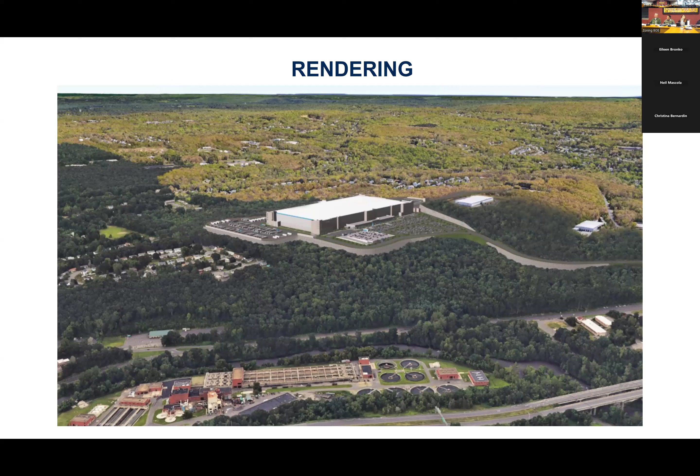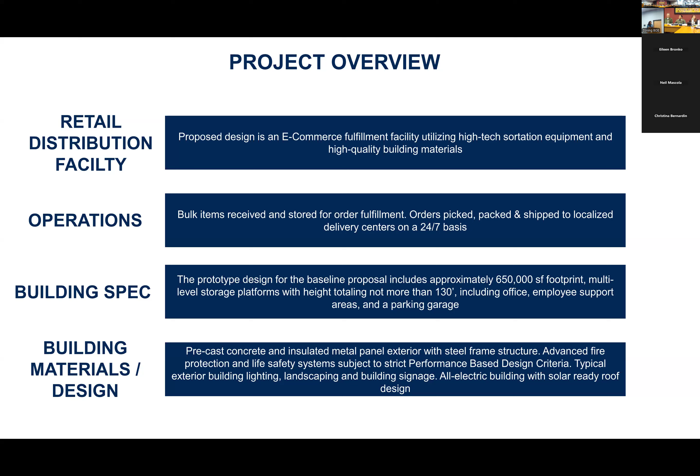All goods that come from this distribution facility will go to another distribution facility that then delivers goods directly to consumers. Operations run on a 24/7 basis, 365 days a year. The building we're proposing is going to be all-electric, so we've already started the process with Eversource on meeting the electrical demand for the site and understanding what improvements are needed.

In terms of project benefits, buildings of this scale are typically assessed at over $150 million. For this site, we're estimating the value to be over $200 million, which would go to both Waterbury and Naugatuck and increase the tax basis. There are a lot of permanent jobs that come with this building -- we're estimating between 500 and 1,000 permanent jobs.

That's because most of the picking happens on the higher levels with employees working to get that stuff done. Also during the construction schedule, between 24 to 30 months as our preliminary estimate, it will bring about 300 jobs throughout that duration. Additional project benefits include some of our offsite improvements, which we'll talk you guys through today as well.

As a site overview, to orient you all to the location of the site, this is a zoomed out view of both Waterbury and Naugatuck. The area highlighted in purple in the north is the limits of Waterbury, and to the south is Naugatuck. Our project is directly in the center and spans both municipalities, highlighted in yellow in the middle.

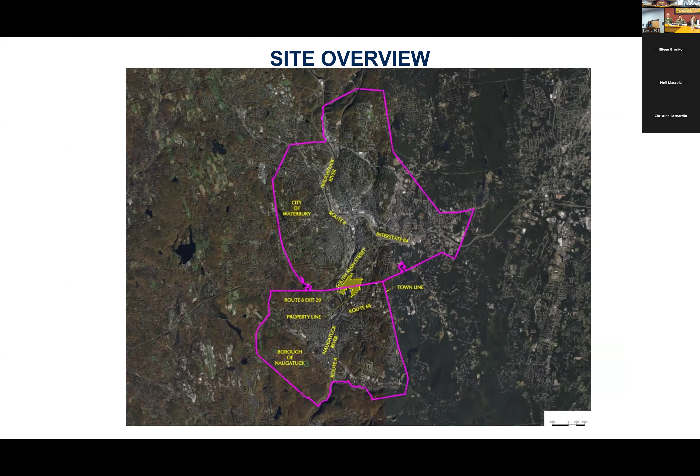This is a zoomed in view of its location. There are multiple parcels that comprise this project and development. The parcels in yellow -- the main parcel is to the north, and then to the east there are 2 parcels within Naugatuck, also noted in yellow text, which are the parcels that will be purchased and where most of the building will sit.

The parcel in orange is just to the west, between the division of Waterbury and Naugatuck, just south of that. That parcel is owned by Waterbury but located in Naugatuck, and in the purchase and sale agreement it will provide easement and access to the main site. The last parcel, in blue text, just south of that one, is currently owned by Amazon and will also help facilitate access to the main lot.

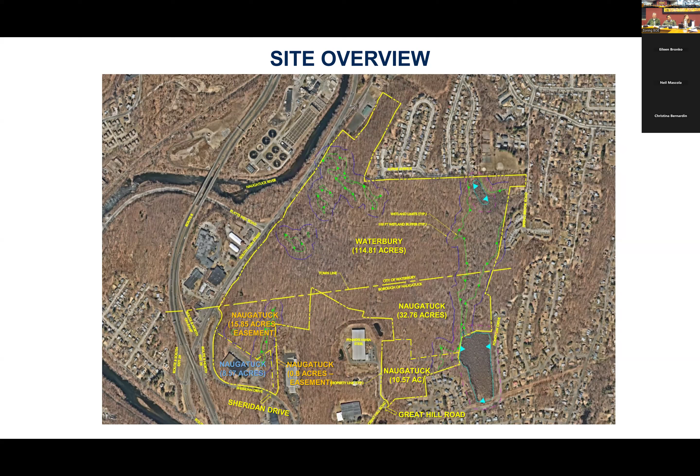This provides some history on this project. Both Waterbury and Naugatuck wanted to use the site that they own to spur and encourage economic development. The topography of the site is very challenging -- it ranges about 300 feet in elevation, so access from South Main Street is basically rendered infeasible for the site.

They came together and purchased that 10-acre lot that sits at the foot of Great Hill Road, which helped provide access to the site. That one location is what we're using as the main truck entrance and exit for the site. The other parcels, where we're having easements and are purchased by Amazon, will also provide access for employees and trucks on a somewhat infrequent basis.

I do want to note consistency with the plan of conservation and development. Again, the goal is to encourage economic growth and foster new job opportunities and job creation, which we're doing with full-time employment as well as construction jobs for the site. Also, a specific goal and strategy is to recruit new businesses, which we will be doing with Amazon as a tenant here. The land use section in the plan of conservation and development specifically references the Waterbury and Naugatuck Industrial Park, where the site is located, and references the site as a potential Amazon distribution facility.

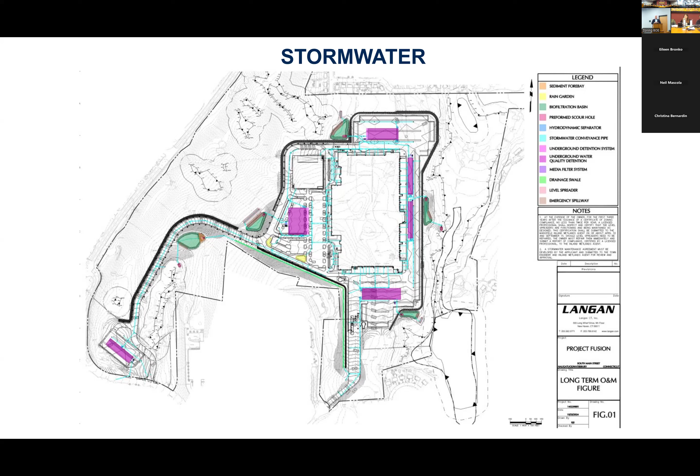This is probably the first project of this scale that will require compliance with that, and it has dictated a number of improvements above and beyond what you've seen in other development projects. We have hydrodynamic separators, or vortex units that spin the water, underground chambers that capture and attenuate the flow, and a filter system that filters the first inch of runoff prior to discharge off-site, allowing us to do phosphorus and nitrogen treatment required in the new stormwater manual. So it's a significant treatment train for stormwater.

Here are some photos of what those components look like. The top left photo shows the underground chambers used to capture runoff from the roof and pavement, allowing us to meter it off to mimic existing hydraulic conditions. The photo to the right shows what the filters look like - these are whole house filters you may have, but at an industrial scale.

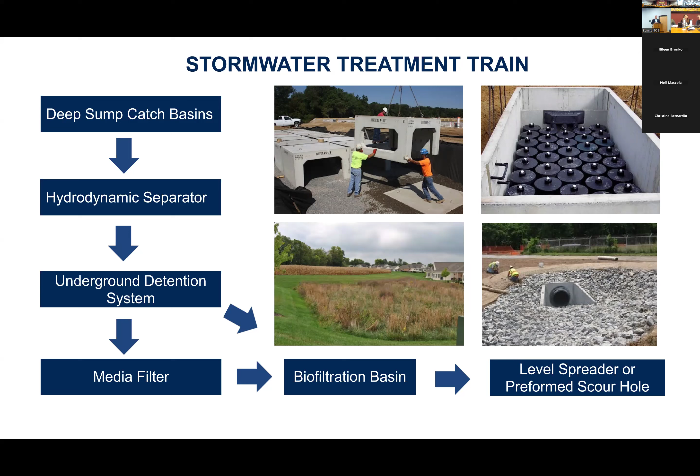They live within a vault and provide filtration of the water prior to discharge. The lower left-hand photo is representative of what the basin would look like after the water is retained in the structures and filtered. We then discharge to a pond, which provides some final finishing and cleaning, with a meadow type finish like shown here. The last step is a controlled discharge through a pipe and riprap to take the velocity out of the water and allow it to head back to adjacent wetland bodies and offsite locations.

Soil erosion and sediment control is important for a project of this scale, and it's something we spent considerable time on during the inland wetland process. As part of the site plan application, we have a 3-phased approach. We show how soil erosion and sediment control starts essentially on day 1 as site clearing begins. We have a phase showing what it will look like as retaining walls are built and subgrade is being prepped, and a 3rd phase showing what would be used as we head towards final paving.

Catch basins may be installed, underground systems exist, basins have been installed and need to be protected - this has been reviewed by your 3rd-party peer reviewer. It's subject to Connecticut DEEP permit application because of the scale of the project, so we will file a general permit with DEEP for registration. Also because of the scale, we have to retain a 3rd party, independent of Langan and of Tighe and Bond, with no involvement in the design, to do another round of peer review for our soil erosion and sediment control measures. They must attest to DEEP that they've reviewed the plans and that it's in conformance with the state's guidelines.

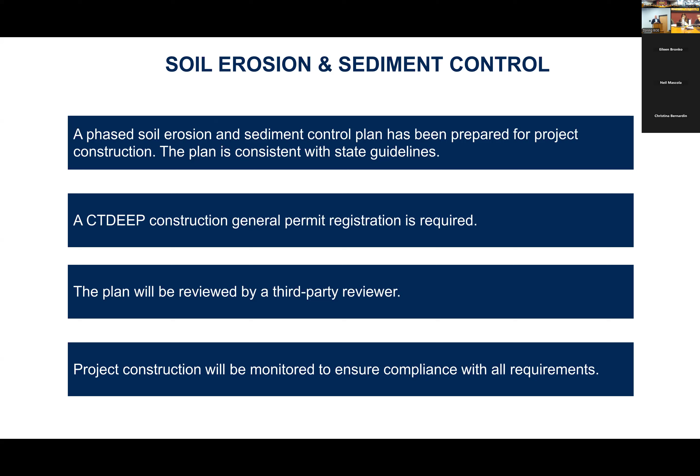In addition, during construction, the general permit requires weekly inspection as well as inspection after significant rainfalls. As part of the wetland approval process in Waterbury, they have also identified an independent party to represent the city to do periodic inspections, making sure the construction team stays within the bounds of the permit. So there are lots of eyes on ongoing soil erosion and sediment control, in addition to oversight from the state.

In addition to site lighting, also prepared by our landscape architecture team, there is a planting plan identifying installation of new trees, shrubs, and ground cover to restore disturbed areas, as well as how we would plant the stormwater management basins. That's supplemented by wetland mitigation work proposed and included in our wetland applications to the borough and city, where we enhance areas we don't disturb as part of site work but that include invasive species within the buffer area surrounding the sites. So as part of our permits in both the borough and city, we have additional landscaping work that removes invasives, plants native species to help box those out, and includes a monitoring program to ensure sustainability.

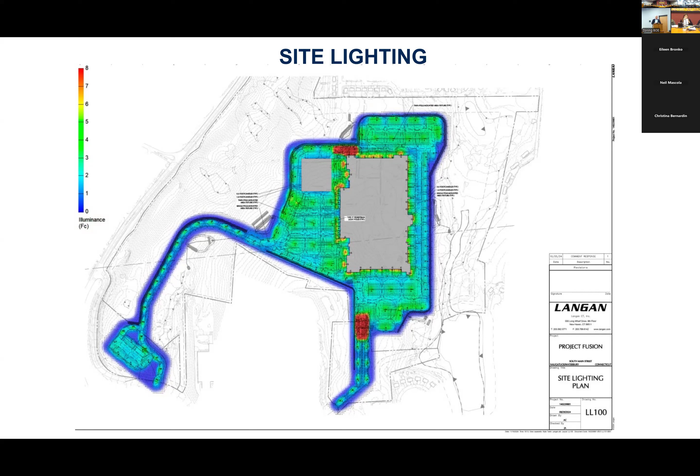Oh, you're right. I'm sorry. I went too far, I was on a roll.

There we go. Great. Thank you again, Tom Cody.

I wanted to point out for a moment, we submitted a letter this morning seeking an interpretation from the commission regarding one point in the zoning regulations, which came out of the discussion we had with Tighe & Bond and the town staff as we went through the site plan.

The question was asked about a retaining wall, and the retaining wall in question is at the southern end. Down at the very southern end, as the entrance drive, this private drive comes down to intersect with Sheridan, running along the length of that drive is the retaining wall. The retaining wall is in part supporting the drive as it reaches Sheridan.

And that retaining wall crosses this property line here, and it also crosses very slightly here, this other property line. This is the parcel owned by Amazon. This is the parcel owned by the city of Waterbury. And the question was whether this retaining wall, which was really part of the private drive,

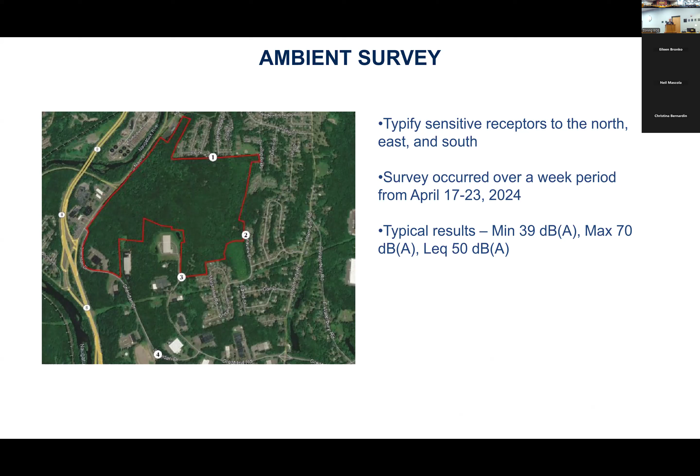To me, that provides great alignment with the directive from the state and from the Waterbury Code of our target goal of 51. So if we design the site to have maximum levels of 51, that's going to blend in very well with the existing average levels of 50.

I'm going to show our models and results, but first give you the background of what we'll look at in the next couple of slides. Our first step is looking at the stationary noise sources - that's going to be the mechanical equipment. We have over 60 different units that are large enough in size to be of interest for a sound study.

There's also dozens of smaller ones, but when they get so small, they end up not contributing to the greater picture - there's no cumulative effect. So we look at the big guys, 60 of them, distributed across the building. We're also considering parapets around the building - those not only screen visually, but also acoustically. So those are going to be big components of our HVAC analysis.

Getting onto truck activity, we know trucks are going to be coming and going on site - those are significant contributors of noise. There's no denying a truck is a high level noise source. We see activity within the truck court ranging anywhere from 74 to 79, depending on whether the truck is idling or driving. Some of our bigger culprits of high level sounds would be backup alarms, coupling and decoupling - when trailers connect and disconnect - and also air brake release.

Given the variety there, you can see from the slide where we point out that idling trucks are down at 62 dBA at 50 feet. That's significantly lower, on the order of 10 or 15 dB lower in level than some of these high level events. So what happens is they're so low in magnitude that they don't influence the cumulative effect off-site. For a noise study, we traditionally don't look at idling trucks as a contributor of noise. We understand there are also regulations limiting their duration, but the focus is to see our maximum emissions and have those comply with our project goals.

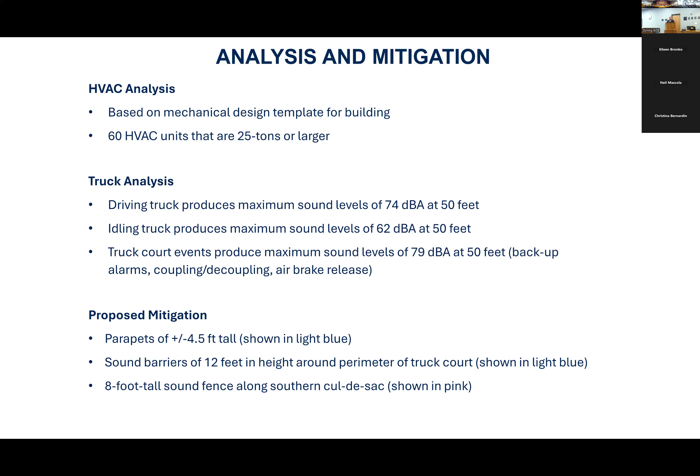Not much else to say about this other than this is the presence that's there 24/7. So in the absence of truck activity, this is where we fall down to.

Question? Yeah, could you give some examples? You're saying 40, 50, 60. Could you give examples of what that sound is?

Sure. I can speak in terms of magnitude. The daytime limit is 61 - these numbers aren't picked out of thin air, although they can vary a little bit per jurisdiction. Something in the mid 60 range would be two people speaking at 3 feet, about 65. So having a daytime goal of having external noise not exceed that would mean we wouldn't have to elevate our voices to have a discussion. That's what the daytime limit is there to prevent.

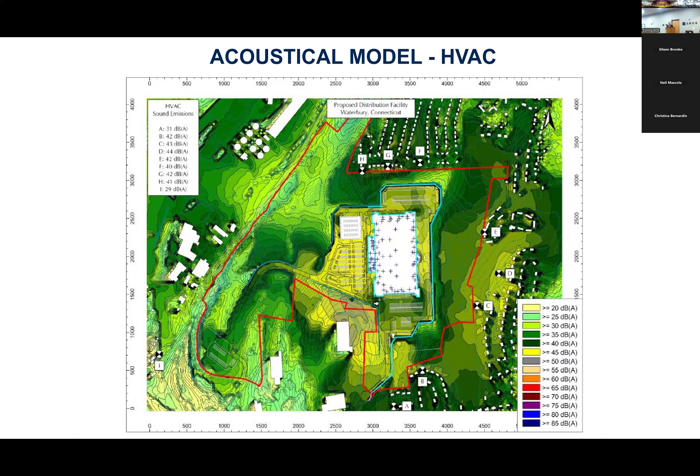Of more interest would be our truck activity. Now we know the trucks are coming and going through the day, but we have to recognize that they are dynamic. Trucks go and come, and much like we'll hear about traffic next, we follow a lot of the same premise and use much of the same data. We know that over the course of an hour we might expect X number of vehicles, but they don't all show up at 9:01 or leave at 9:59. They're distributed across that time. So one of the challenges we have from a noise point of view is how do we represent that time factor? I already have a three-dimensional model, but I almost need a fourth dimension of time to be able to press play and show how these will interact and move across the site.

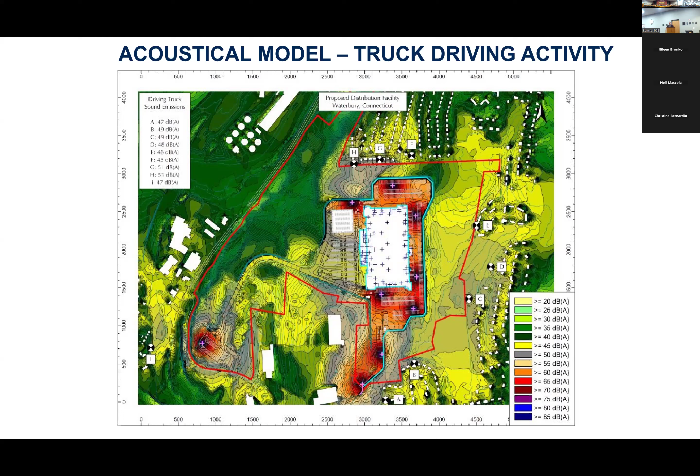So just a summary - we were able to look at our steady contribution of HVAC. The presence there is going to be anywhere in the 40 range, low 40s. That's well below the average, and in fact it's more aligned with some of the lows. We showed that during the 7-day ambient survey the lowest level measured was 39, and that only occurred for an hour period on a day or two, so that's not the bulk of what the area is made up of. But having HVAC be down around that area really shows how that's going to blend in with the environment and not be disruptive.

Now, on the other hand, the truck operations - we show that the activity on site, as dynamic as it would be, we could have a considerable amount of activity on site and still cumulatively meet our project goals. Those will be in motion, so trucks come, trucks go, there'll be lulls, then activity, back and forth on that scale. We showed that those comply with project goals as well.

In summary, the project is able to show that we meet our project goal, which is aligned with the existing ambient, which is prudent because that means we're not going to have a negative impact. That also aligns with what we've established as not only the local, Waterbury, and state code limits, but what we've also adopted as our project goal for trucks, even though they're not regulated in the same way as stationary sources. All of the above help support that this project is going to be a good additive to the area and not result in any negative impact, and that the site is well designed to allow that to occur.

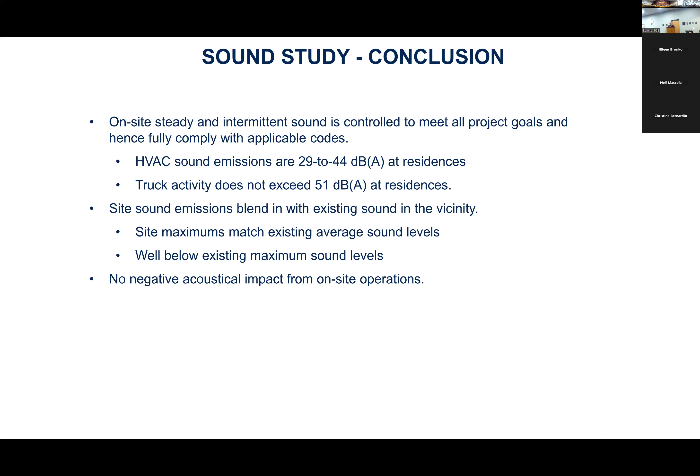Now to traffic. Question? Yep. I just have a few questions. Number one,

Decibel is a unit of measure. Please correct me if I'm wrong, but for each decibel point that goes up, that's a doubling of the previous number. In other words, it's not a simple case like on your radio where one click is 1 decibel. In reality, going from 50 to 51 would actually mean 51 is double of 50.

It's challenging to think of it that way, because a lot of people also talk about loudness being twice as loud, and loudness has its own unit than decibels, but just know the unit is decibels. I have an A at the end, referencing the A weighting. Frequencies across the spectrum are what they are, but our ears hear them a certain way, so that A-weighted metric corrects that to be balanced, using the appropriate environmental metric.

But it's a logarithmic scale, not linear. So if we have 2 compressors each producing 50, and I'm standing 10 feet away from them, the resulting combination is 53, not 100. When you see the addition of two, the most they change is 3, to give you a feel for how those relationships are to the human ear.

Changes of 1 or 2 are going to be very difficult to discern, if at all. Changes of 3 will be just discernible for somebody with good hearing. Changes of 6 are going to be noticeable, and changes of 10 is where you see either a doubling or halving of loudness. So there are complications there because we're dealing with energy and how it gets added.

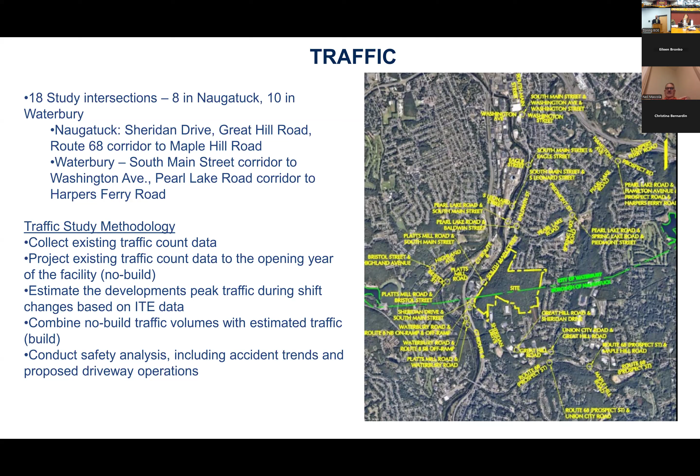Lastly, we add the baseline traffic from 2027 to the traffic we're estimating to be coming to and from the site, and then you get your build conditions. What we did there is analyze the existing, the no-build, and the build conditions, with the traffic volumes associated with all three, to compare the exact delta in terms of traffic queues and traffic delay between pre- and post-development. That way you get a good idea of exactly what the impact specific to the development would be. Based on that, we conducted our traffic study, and we'll get to the results in a minute.

So we do feel that the project is less impactful, specifically due to its proximity to Route 8. We feel that Route 8 gives people a way to get to the site over on the highway and get off the site, or get off the highway, with pretty much less than a mile from the exit ramps to the front door if you're an employee, just over a mile if you're a truck. It really assists in limiting the impact of this facility to the surrounding roadways.

So what I mean by that is there are going to be employees living in Naugatuck, living in Waterbury, who will be driving to this facility if they're employed here. There are many ways to get here, but there are some people who live on the north side of Waterbury or the south side of Naugatuck for whom it may be quicker to get to the highway. So while we did study a wide range of intersections, many people will opt to take the highway to get here. The Naugatuck River is kind of a natural barrier that prevents people on the west side from getting there, so sometimes it might make more sense for them to get on the highway.

So we feel that the proximity to the highway actually is a net benefit to this facility, limiting the amount of traffic directly resulting from the facility on the surrounding roadway network. And with that, the results of our study show that the existing roadway is capable of handling the added traffic from our site, with a few notable improvements, which I'll get into in a minute.

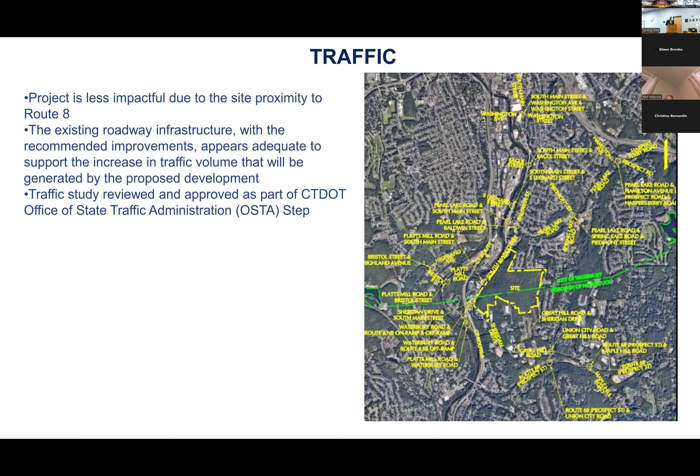Before I get into the recommended improvements, I wanted to touch on employees traveling to the site, but also give more information on truck access. Trucks have a little over a mile to get to the site.

Most, if not all, of the trucks we're forecasting will be coming directly from Route 8. It's the quickest and easiest way to get to the truck entrance off Great Hill Road, directly from the exit 29 ramps. Most of the trucks coming to the site are bringing raw goods or prepackaged goods to be sold and packaged, and then the trucks leaving are carrying fulfillment boxes going to another facility for delivery. So trucks will be coming to and from the site for two different purposes.

Many of the trucks are going to be coming directly from Route 8, because that's the easiest and best way to get there for goods coming from longer distances. You'd get off exit 29, either coming north or south on Route 8, turn onto South Main Street, turn right onto Sheridan, go up the hill, take one left, and once you're at the top of the hill you're at the main truck driveway. It's a little over a mile.

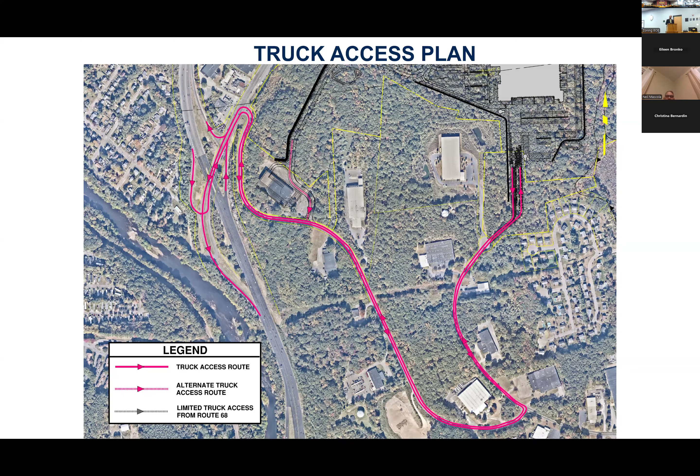Specifically at the intersection of Great Hill Road and Sheridan, we are proposing to widen this intersection to handle the additional trucks coming to and from the site. Despite this intersection being in the industrial park, we've noticed that under existing conditions there's rutting, curbs being banged up, and landscaping being driven over by trucks today. So we're proposing to widen this intersection to allow for the greater volume of trucks, but also to accommodate existing trucks that seem unable to make the movement without driving over the curb.

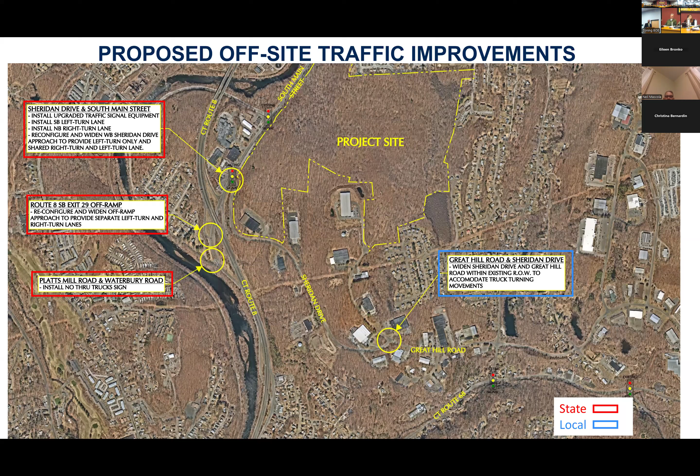I'll get into the details in a minute, but to highlight - we're going to focus on the South Main Street and highway off-ramps here. This slide shows the intersection at the southbound Route 8 off-ramp. What we found in our study was that many employees coming to work are taking the left, and we don't want traffic backing up onto the highway.

So what we're proposing is to add a separate left turn lane. Right now it's just one lane where you turn left or right. We'd be adding a separate left turn lane, allowing people going to the facility or cars trying to turn right today to make their movement safely. To support that, there's a grass median that we'd have to shift to the north. This intersection is under state jurisdiction since it's a state highway. They're looking at it, but we're going to meet all sight distance related requirements and make sure this intersection can accommodate both passenger car and truck traffic.

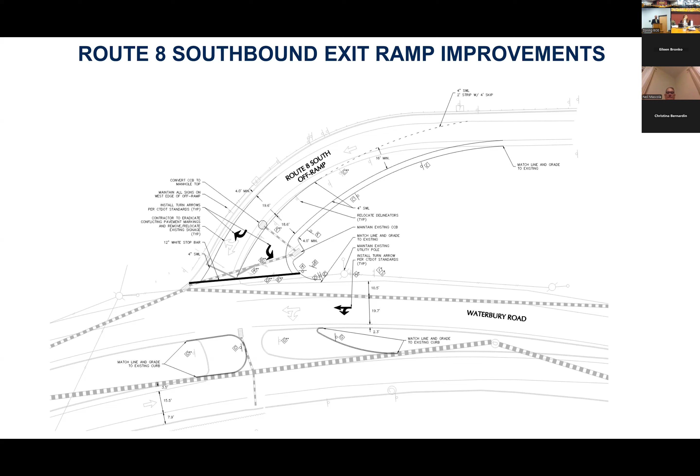Moving just slightly south here, we have heard concerns from neighbors in the Platts Mill neighborhood community about existing truck traffic just to the south.

I know that Platts Mill does kind of horseshoe around and come back to South Main Street in Waterbury. But it's the residents in Naugatuck that we've heard from have concerns about some of the existing truck traffic that's there today. I will state for the record that no Amazon trucks should be taking this road. There's simply no reason to. There's no way for them to get anywhere they need to go by taking this road up Platts Mill.

But hearing from residents, we've heard that there's existing truck traffic that is either a nuisance or noisy or something of the sort. So what we're proposing here is a no-through-truck sign to alleviate an existing concern. We're already going to be going to the State of Connecticut DOT for their review and approval on pretty much everything else, and signage and the regulations around that would be something we'd commit to doing with the DOT's approval. So we wouldn't be impacting it with our facility, but we'd be trying to eliminate an existing concern.

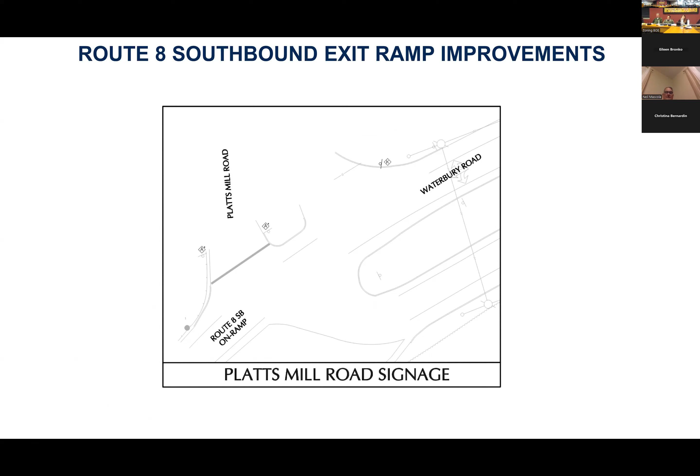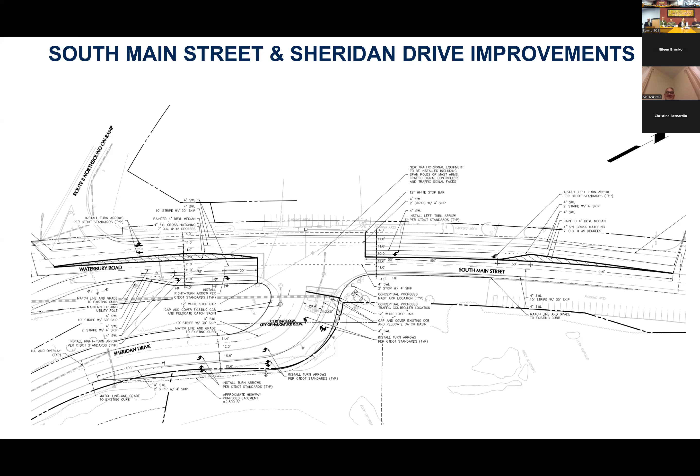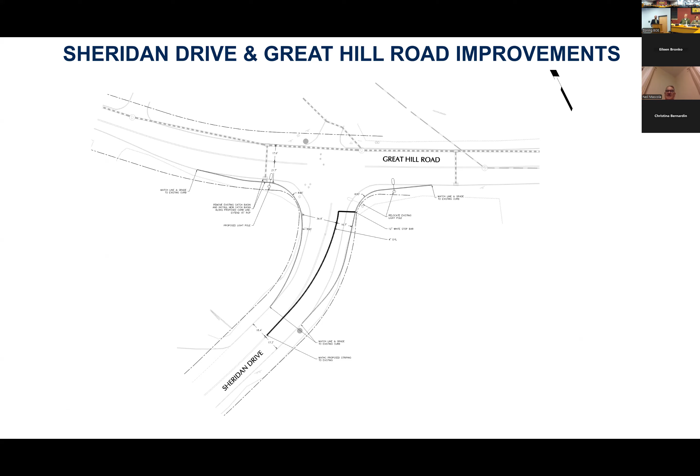And with that, I'll turn it over to Jeremy to talk briefly about the architecture. Can I just ask a quick question?

Sure. With regards to the Route 8 South exit, we mentioned widening it and installing a left turn lane. Is there any discussion about putting some type of light there, considering the amount of traffic? You said 24 hours a day, so that's 3 shifts - you're going to have 3 times a day when that ramp is chock full with traffic coming south. Just curious whether that was considered, and if so, how that decision was made.

Great question. The short answer is yes, it was considered. The Connecticut DOT uses a federal manual called the MUTCD manual, which provides stipulations on traffic volume that would warrant a traffic signal - it needs high enough volume for up to 8 hours a day. We looked at the busiest 8 hours at the highway off-ramp, and it doesn't warrant a traffic signal. We did explore it, we did see if it would work, but there's simply not enough existing traffic along with the new traffic to warrant one. With the stop sign at the bottom of the ramp and free-flowing traffic, plus the extra lane, we're confident it can accommodate all the extra traffic along with the existing traffic without backing up.

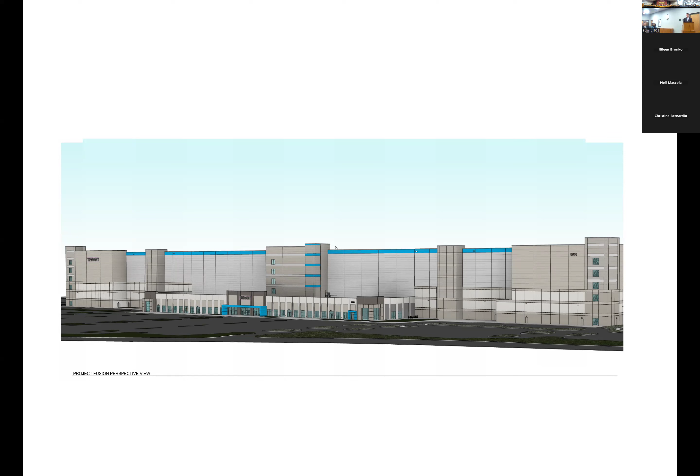Here's a quick rendering of what the building is going to be. According to Naugatuck standards, it's about 106 feet tall, based on how zoning in Naugatuck measures. The main components - the lower couple floors are precast concrete with insulated metal panel surrounding certain areas to give it more detail, and some storefront along the front edge. The upper levels are all insulated metal panel with various colors. There's a lot of undulation in this building, so it doesn't look like just a big box like a typical industrial building.

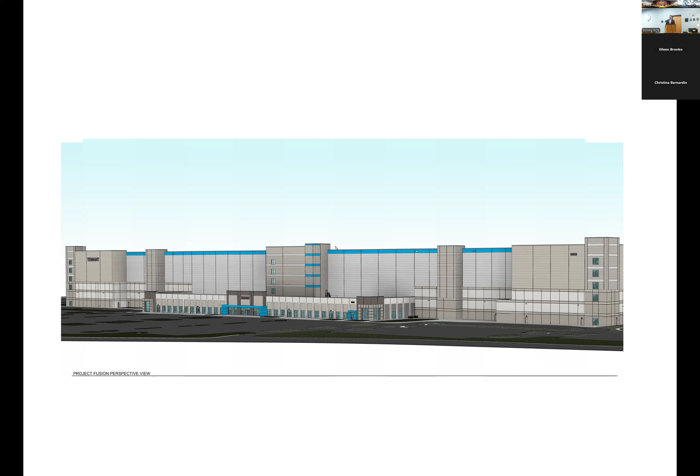Some of the materials we're using are insulated metal panel, storefront, and precast concrete. What do you mean by storefront? I mean - this isn't a public access building. No, storefront curtain wall, it's just the typical glazing, like a corporate storefront.

We have a couple of views to show you as well.

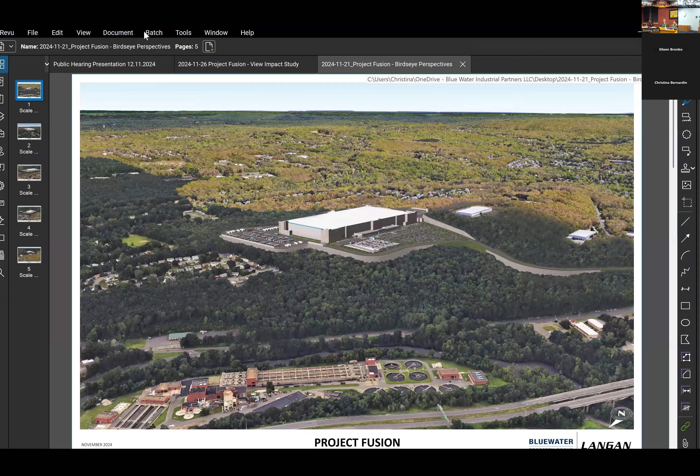Individual trucks will not be going to this facility - regular Amazon trucks that go to people's houses. Is this strictly going to be semis going in and out, nothing else? Yes, correct - the Sprinter vans would not be coming to this facility. So it's just 18-wheelers going in, dropping off stuff, other 18-wheelers picking up stuff. Yes, and employees, of course.

Okay, so we have a few bird's eye views to show as well.

On the stormwater filtration - you mentioned alignment with current March 24 standards, including a new stormwater filtration system. I'm curious about the filtration system with regards to permanence and life cycle - is this something that has to be replaced, like the one in my kitchen every 3 to 4 months, or is it something you set and forget?

As part of this, per my professional engineering judgment, the typical life cycle before real maintenance is about 5 years on these filter systems, so they are not like your Brita filter. There is some operations and maintenance guidance in our stormwater management report, and as we come online and start to understand the loading, you check them after 6 months, after a year, but from the manufacturer, actually pulling the filter and back flushing it is typically about once every 5 years.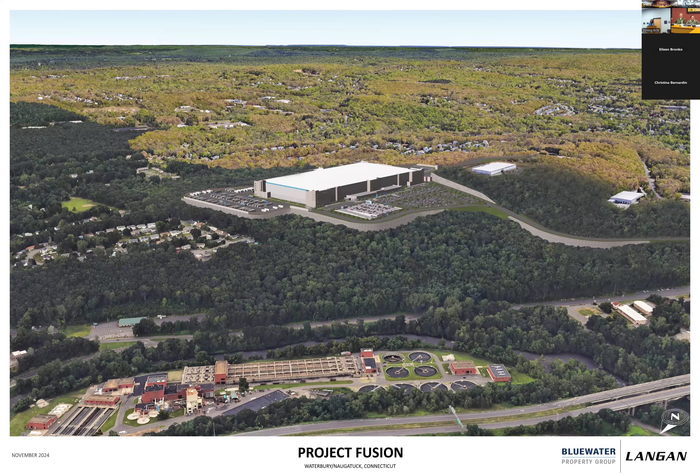This is the next view, also from the Waterbury side. This is northeast, looking south. So you see the back side of the facility as well, for the trailer parking. It's on the north portion of the site.

Next one, this is from the east side, so it would border Naugatuck and Waterbury, looking west. So you're again looking at most of the trailer area, the loading docks, trailer parking of the facility.

This is from the Naugatuck side, southwest facing north. You can see the elevation of the building is lower than the elevation of the neighborhood, so you're actually going down into the site. That horseshoe shaped road on the left is Marsh Hill Road, and over on the right, that long straight one is Pondview -- those are the two areas in Naugatuck.

This is our site coming in from the Great Hill Road cul-de-sac, and the parking. So here, this is Pennsylvania Steel.

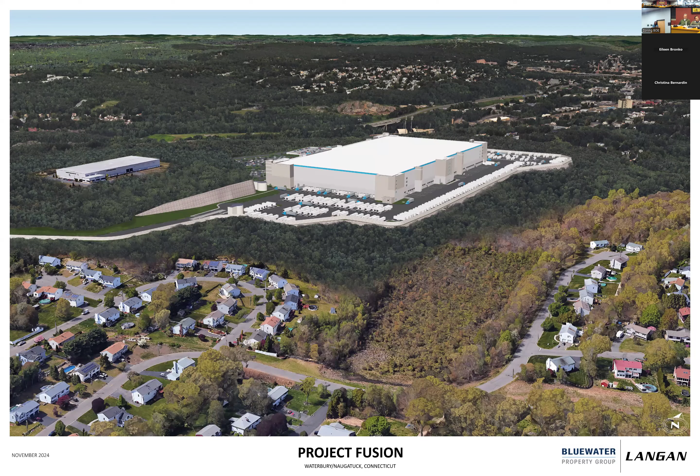This last view is southeast, Naugatuck side, looking north. Same thing -- this is the main Comstock facility. You have Pennsylvania Steel over here, Ken Metal. This is part of the drive coming in from Great Hill Road, and the associated trailer parking.

And then I do have a couple of view impact studies too, and I'll just point to the two views that we have from the Naugatuck side.

There are a couple of views here. We have letters that show the different views we're looking at. I'll focus on the ones on the Naugatuck side, so that's F and G, and the views looking at the facility from ground level -- what you'll actually see on the roads.

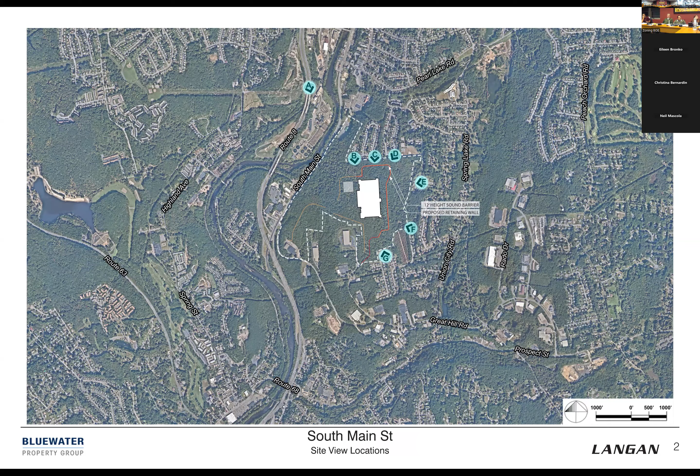You do have this in front of you, with the last 4 slides. All right, this is...

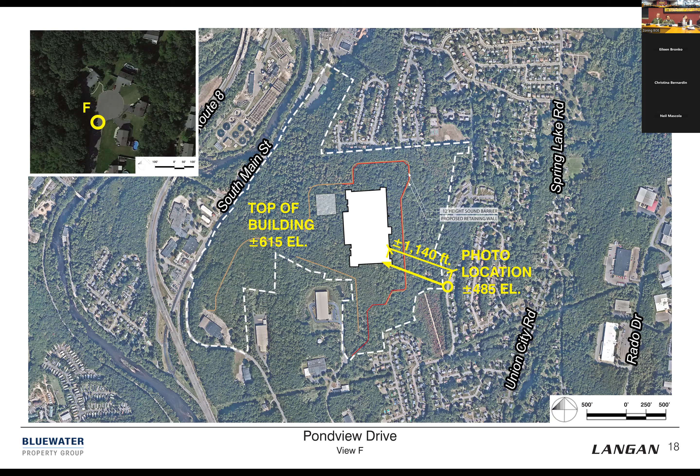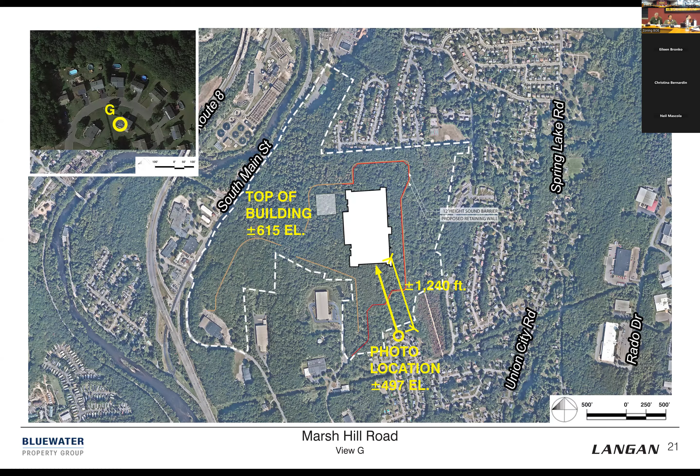Those are the last two views that I wanted to show. I will pull up the site plan, and then if you guys have any questions for us, we'll be open to answer those.

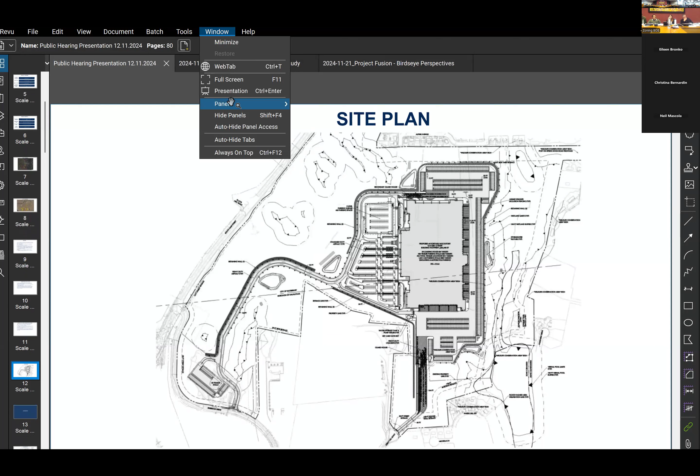Are you done with your presentation? Yes. Okay. What do we have, Tighe & Bond? Come up.

Good evening, members of the commission. My name is Andrew White, registered professional engineer in the state of Connecticut with Tighe & Bond. With me tonight is Colleen Byrne, our transportation engineer, who also peer reviewed the project as part of my team. We reviewed all the materials submitted. As Mr. Underko mentioned earlier, the inland wetlands portion covered stormwater and soil erosion control, which were extensively reviewed by us and went back and forth with the applicant team.

This review did not cover those, as they were all satisfactorily answered and incorporated into the project. So most of the comments we had for the site design were about documenting compliance with the zoning regulations. As Attorney Cody mentioned before, we had some interactive meetings with the applicant team, and the one issue they brought before you was that retaining wall. But most of our comments were clerical in nature—defining front yards, side yards, rear yards, where setbacks are being applied, and dimensional accuracy for what's on the plans and what's reported to you.